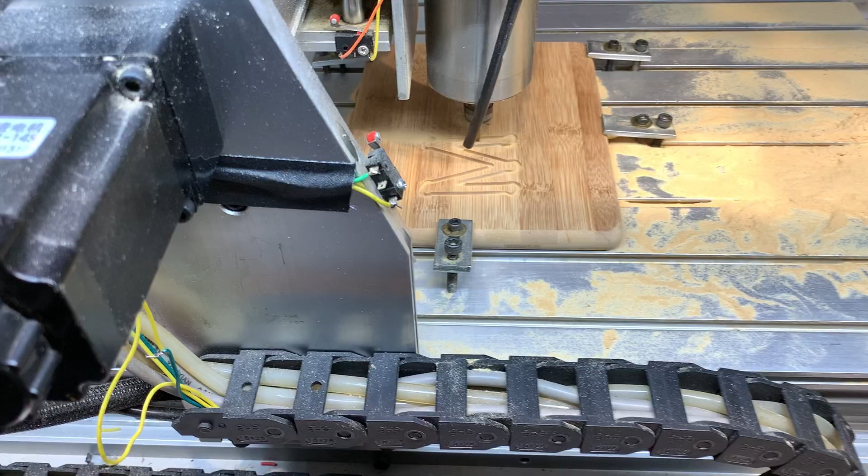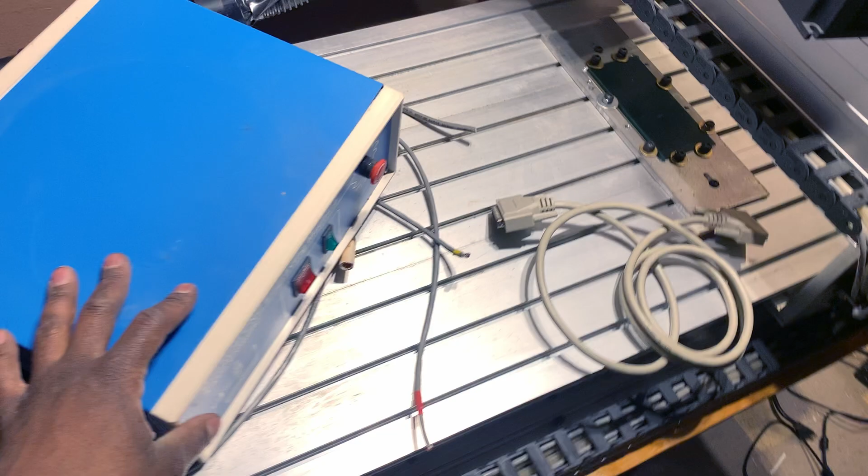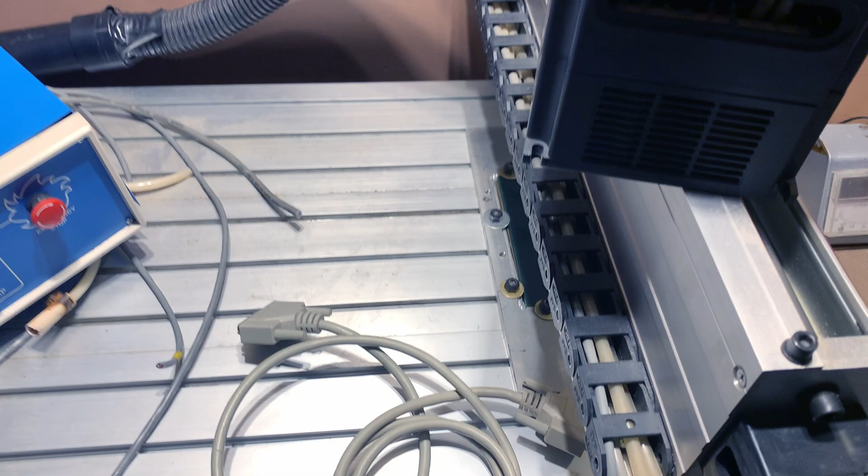Hello everyone, this is my latest addition to my shop, and in this video we're going to be rewiring all of this. I've already started, but I stopped because I thought I would document what I'm doing. You can find this CNC unit on AliExpress. It was donated to me, and I'm going to make it a lot better wire-wise first, and then we'll move on to some other things.

On the back, the wires were just sticking out of this slot. I'm actually going to put holes in here and run them out properly with connections so we can connect the wires in properly. There's a few on this back, not many.

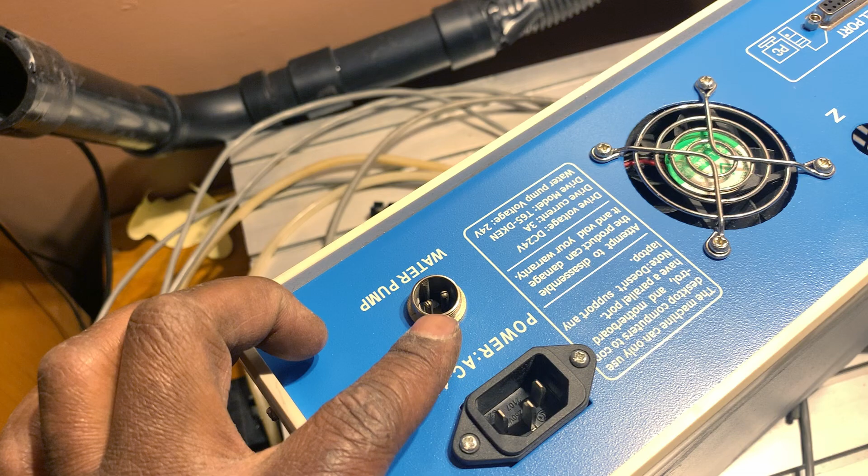This thing, the pump originally came through here. I'm guessing it was a 24 volt pump. I will use this 24 volt to switch a relay.

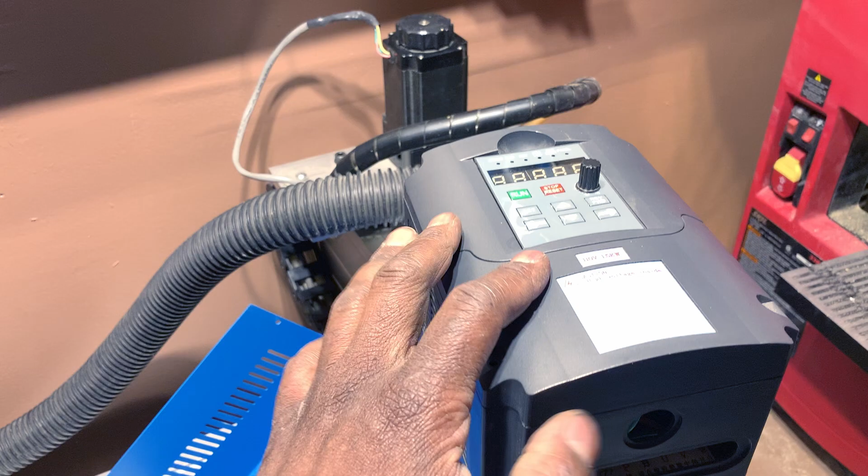And then I found out inside this box, in fact it's open here, the control board actually has a lot more capabilities and it's not being used. This little section here allows it to control this. This is a variable motor control, so you can speed up a motor, slow it down, and this can control that, meaning that the software here can control this, which can control that. So you don't have to manually sit here and turn this. I'm not sure why, when this was sold, they didn't do that. I'm sure that was sold with this unit. But that also means I'm going to have to put another hole back here to run it.

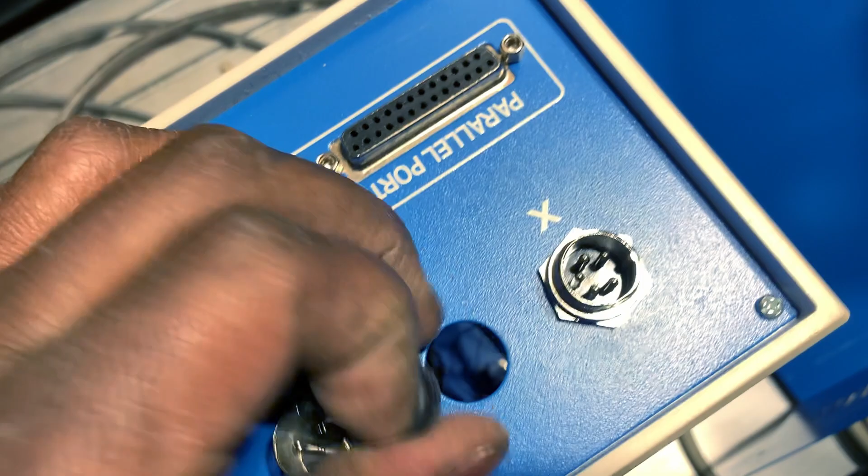But anyway, there's a 3. Let me put this over here. I'm going to grab a 3 for now and just show you what it will look like. That's what it will do. So this is perfect. And that one, again this one's 5, but that's not what we're going to use. We'll use a 4. This is just to show you what it would look like.

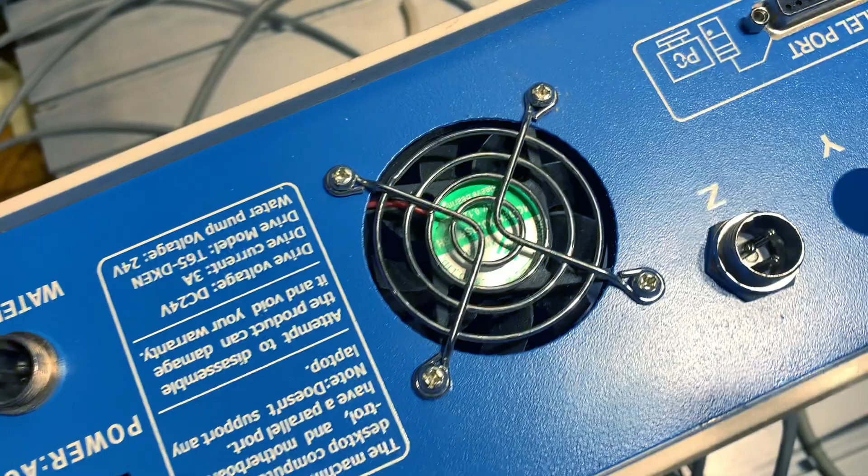Let's see if I got one more in here. Well, of course you can see what it's going to look like because there's one right there. I mean, it's the same exact thing, except that these are... and here is another 5. So I was able to find 4 of them. I'm getting kind of short on them. I'm going to have to buy a few more.

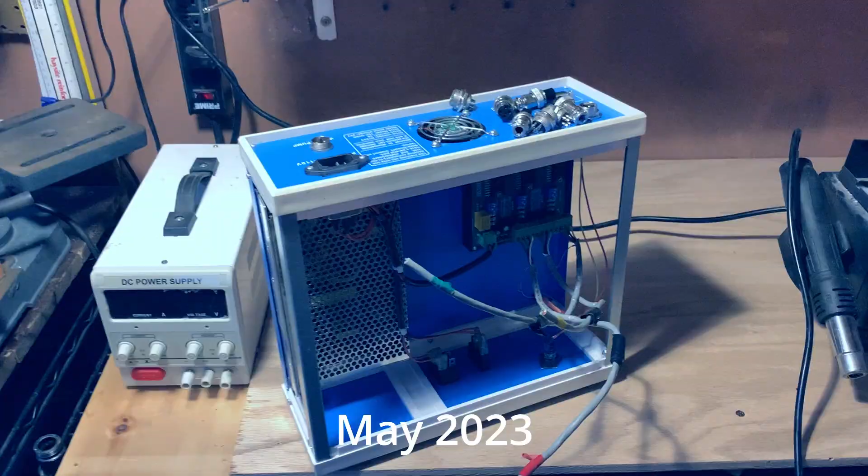So I've been redoing my electronic desk where I do all my electronics. Oh, that's interesting, my printer just came back on by itself. So it's very bare, but that's okay.

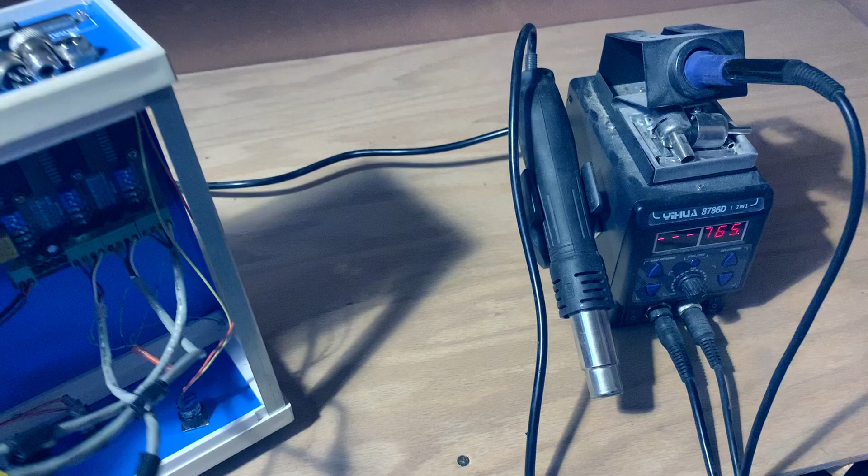I'm going to try to keep it nice and clean this time by not putting all kinds of useless stuff on there. I used to have my drill batteries there, used to be charged here. I think I don't like that, it's just too much clutter. I will move all this stuff into the closet space that we were just in.

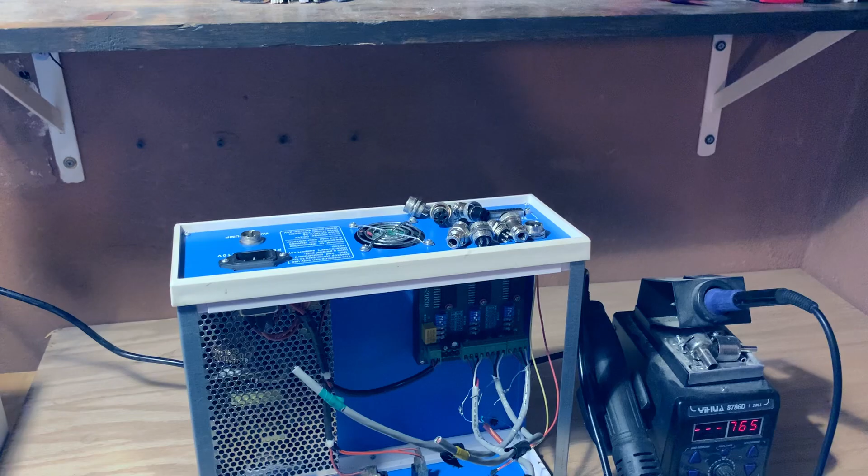But this is a great space to work on this stuff. I'm trying not to do it at my computer desk. It just seems I end up putting everything on the computer desk, and it just kind of gets in the way there.

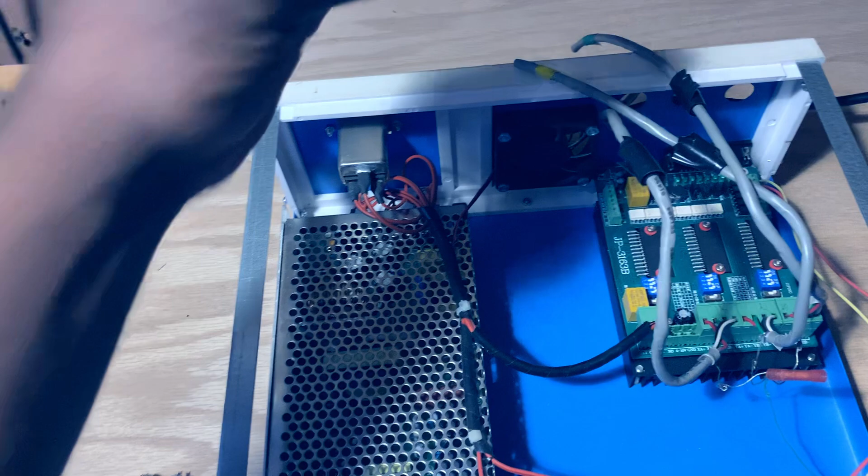This is pretty much one of the things that's always good to see how this goes in, and these come in from the back. And I was going through some of the boxes that this router CNC machine came in, and I found all this mess, minus this. This is the stuff that you just saw me get.

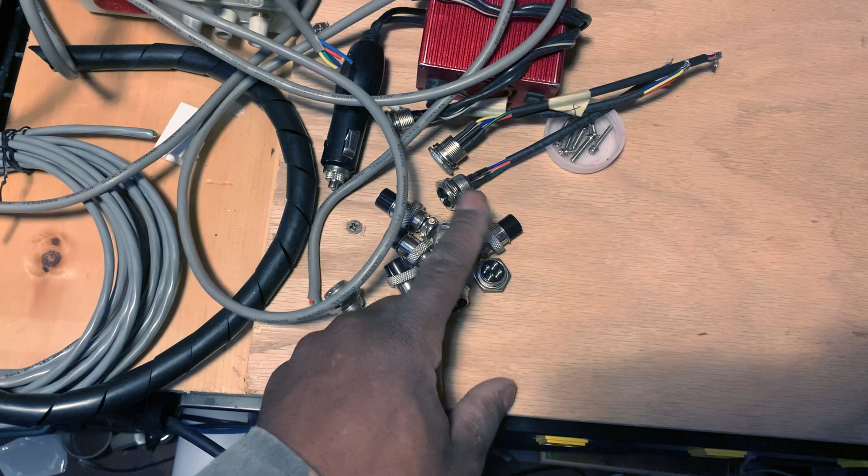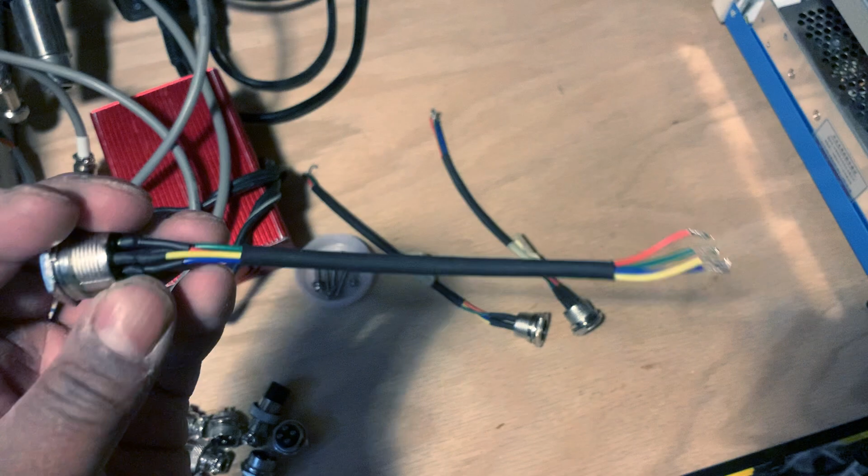But so this machine did have those connections on it. They're exactly like mine, they're already set, so this is perfect for the inside. I won't have to do anything for the inside, they're ready to go. The only problem is I'll have to do a color code swap, meaning the ones I had, if I remember right, were black, red, white, and green. So this one doesn't quite correspond with that. We've got, only thing we have in here is the green and the red. So I'll have to make sure that I get the yellow and blue, and then who knows what the wiring is. Let's see.

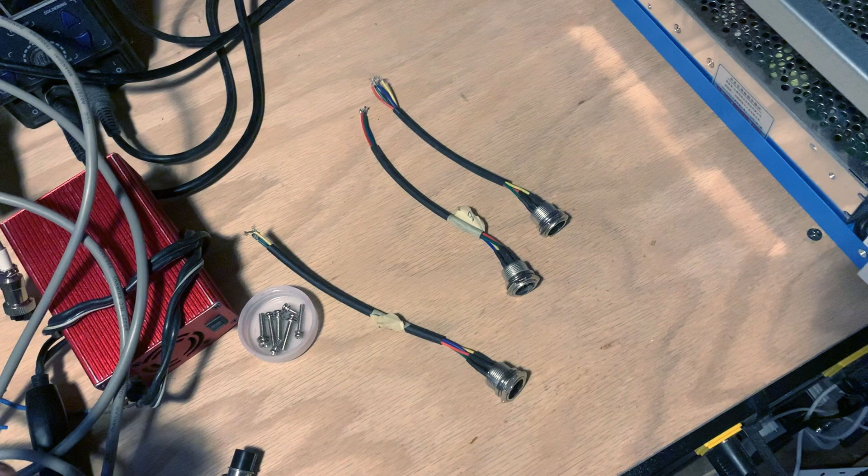So what I'll do is plug it in and then wire it in, and then I'll know what goes where. But that's not a big deal. It doesn't matter what I do on this end - they'll be the same, because as long as I wire the other end the same, this end will be the same, and I can then plug it in. This part goes into the board down there and then runs to the back. So that's not a problem.

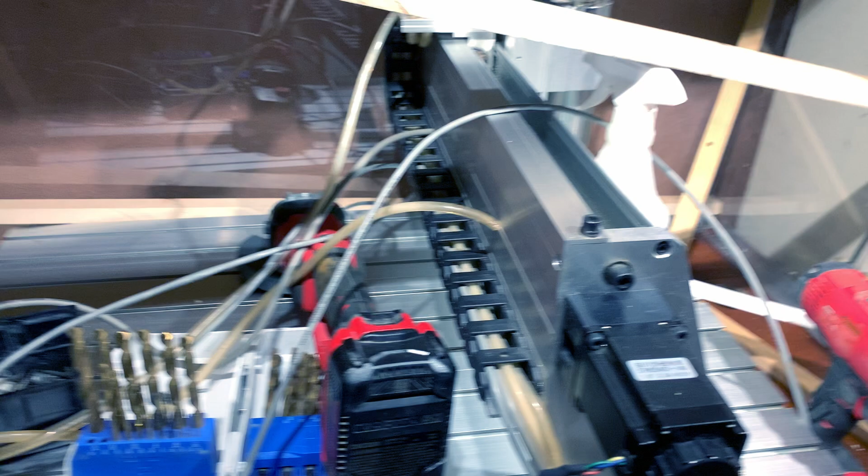Here's a quick update, I'm starting to put a box around the CNC router now, using the plexiglass that was given with the CNC router. And to dress this up, I have all this aluminum channel for the trim, which I'll use on this stuff. There, it's going to go on the edge here.

I'm kind of finishing up for this evening, so everything's a mess in here right now, but I have things set up so I know what I need to continue doing tomorrow.

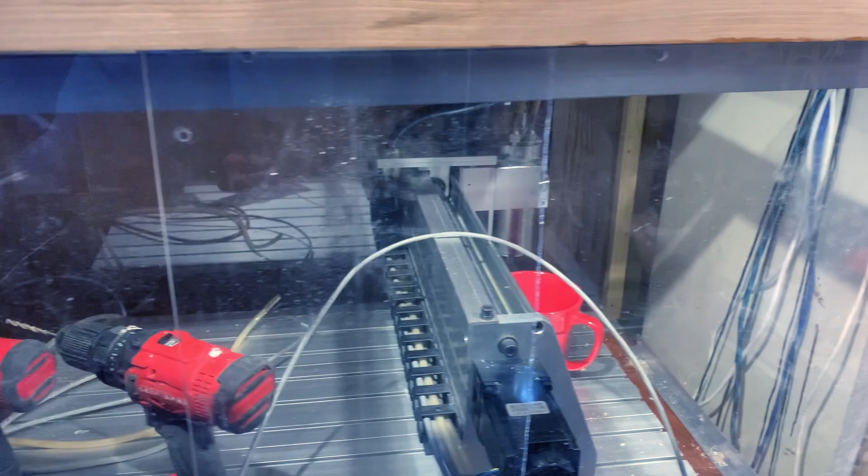This is the finished product when it comes to the box. I put these sliding doors here, hopefully you can see that. I was going to do hinges - remember I said I was going to go up, but I changed my mind. This works out even better.

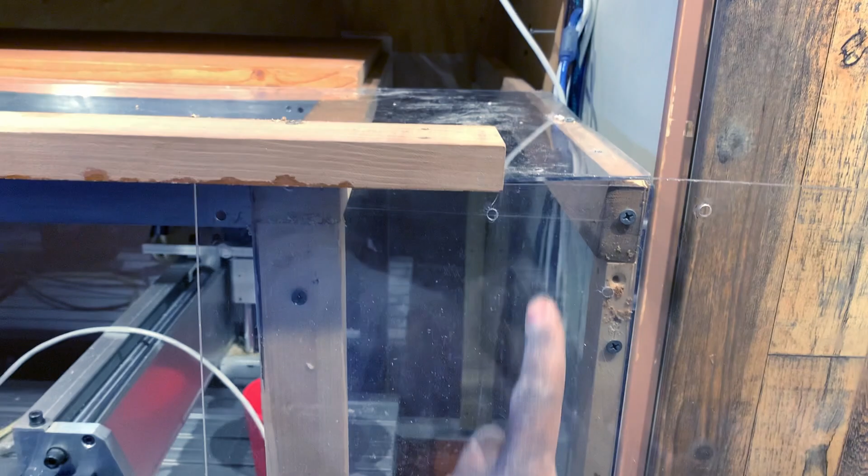I didn't have enough plexiglass to do the whole top, but I put this wood back here. This is removable, easy to remove. That gets light down in there so we can see it. I also didn't take my slide guides all the way to the edge, that way I can take the doors off easily if I want to, but they still slide all the way out of the way.

So it is now November of the same year that I started working on this video. As you saw at the very beginning, I have got the machine running, but there's obviously some things I didn't show you. One of them, you saw me bringing out these wires and putting these metal sockets in the back. But I never actually videoed me finishing it, and there's no record of me doing it. So I'm going to quickly catch you up, because at the beginning it was April and now it's November, middle of November. In fact, next week is Thanksgiving of 2023.

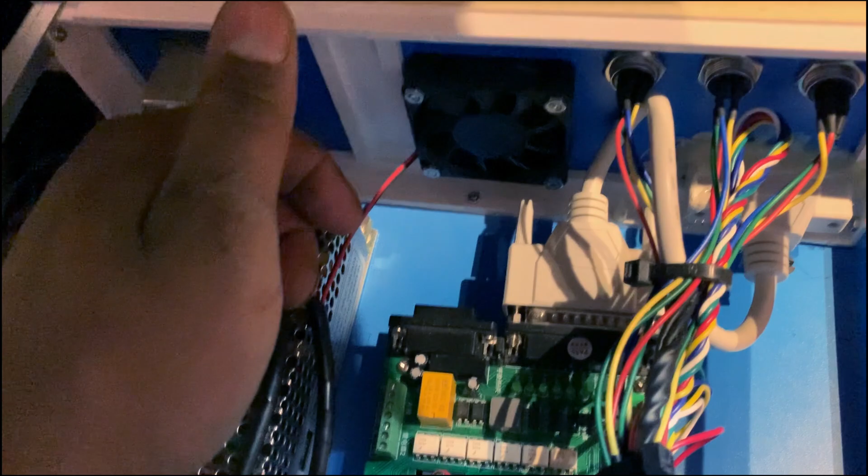I found out that this control board was bad, so I bought a new one, and it's a newer one - usually there's an A instead of a B here. I transferred all the settings on these jumpers. It is not USB, it is parallel port. A lot of young people, if you watch this, know about USB and USB-C - well, this is parallel port, it was way before that.

This is not - it's new, but it's using older technology, which is perfectly fine, I actually like it. But it also means you have to use Windows 7. And this is Windows XP, not even Windows 7 - I think you can use Windows 7, but I'm using Windows XP. This is an old computer that I found. I was able to buy new motherboards and everything for it. It has a parallel port on the back, you can see it there.

I do have this networked, not for internet. Cat not included.

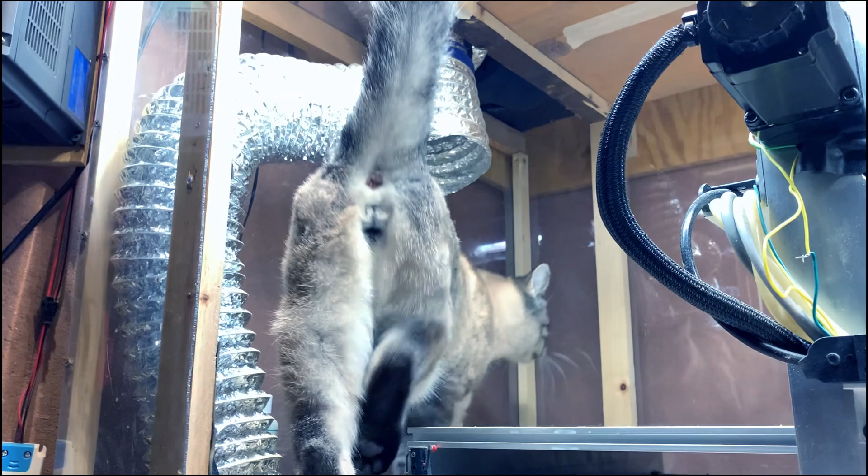Come on, I want to put you over here for a second. Okay, you can go up there too, that's fine. That's actually where she used to hang out when I had my laser etcher in here, so she'll kind of hang out in here - she really liked it in there. Now the laser etcher... I can't even speak this morning... the laser etcher is now here, and she can go around the back. So, what's wrong? What's going on?

Her name's Monica, because I know someone's going to ask. Anyway, I've done all the wiring here - we're ready to go, obviously, because I've already made something with it. I've also put limit switches in, and I took the emergency stop, which is usually here, off, and placed it up there now.

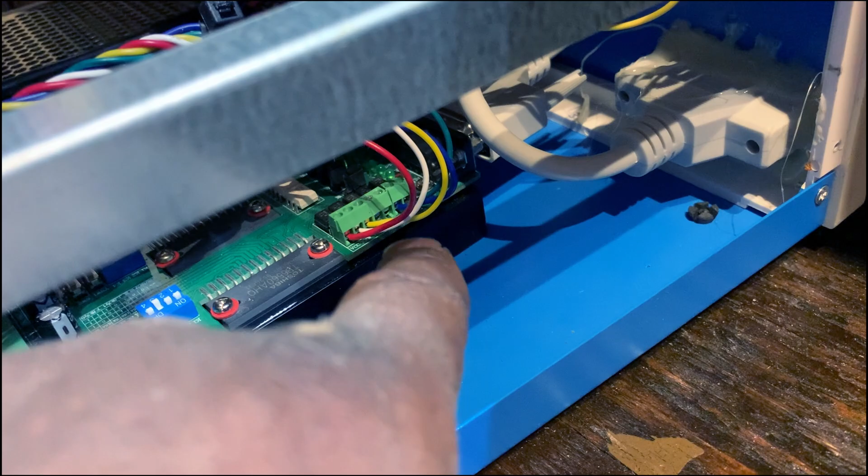This is now where all the limit switches come in, and they're wired in properly. They go on the side of the board here. The emergency stop comes in here too, and all that runs up through a hole that's down there.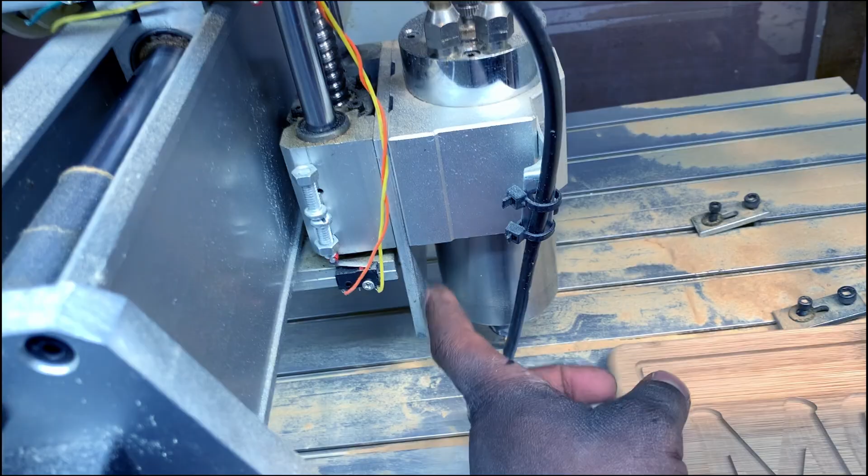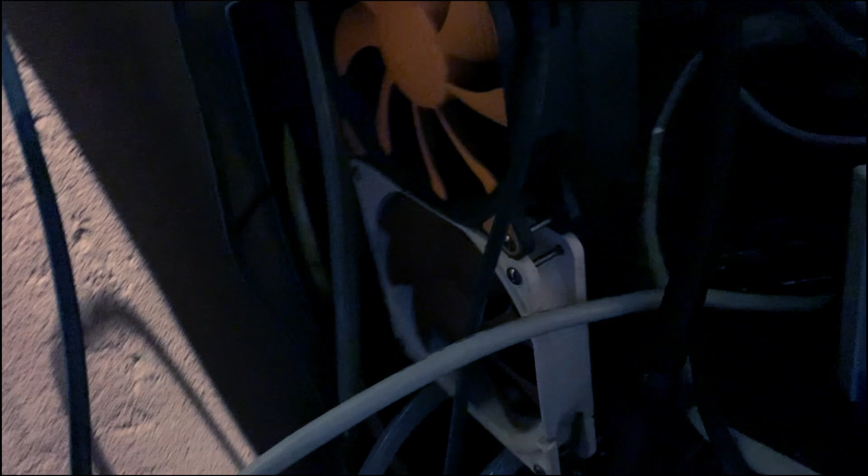Another thing I did is that this is water cooled - the spindle is water cooled. I'm not done cleaning up wires yet, but it is water cooled, and all that flows through a hole down here and goes to a radiator. So this is properly water cooled. It's not just dumping into a bucket, which is what most of these machines do. There's a reservoir down here and the pump is down there. I'll get all this mounted up later.

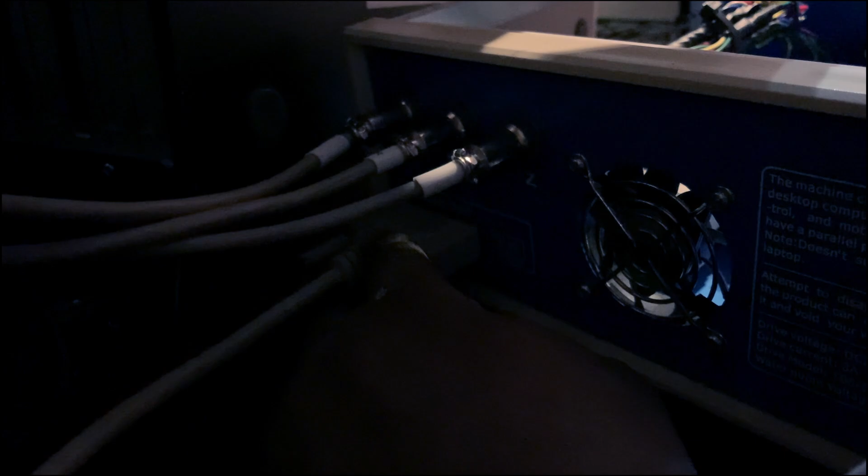What else did I do to this thing? Oh yeah, since this card doesn't go with this box, I had to get this extension parallel port, and everything else is the same in the back. I know you probably can't see all of it, I'll try to brighten it up. But X, Y, and Z are here, parallel ports here.

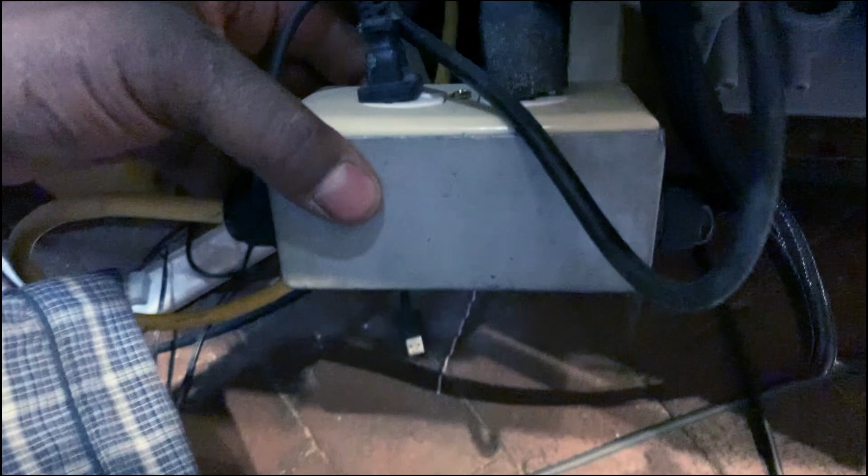Here, I've changed this. This is where the 24 volt pump used to go. There's still 24 volts coming out of this, and it works from this switch up in the front. But what I've done is it now pipes into this little box, and inside this box is a relay, a 24 volt relay. So when I hit that switch, it switches these plugs on.

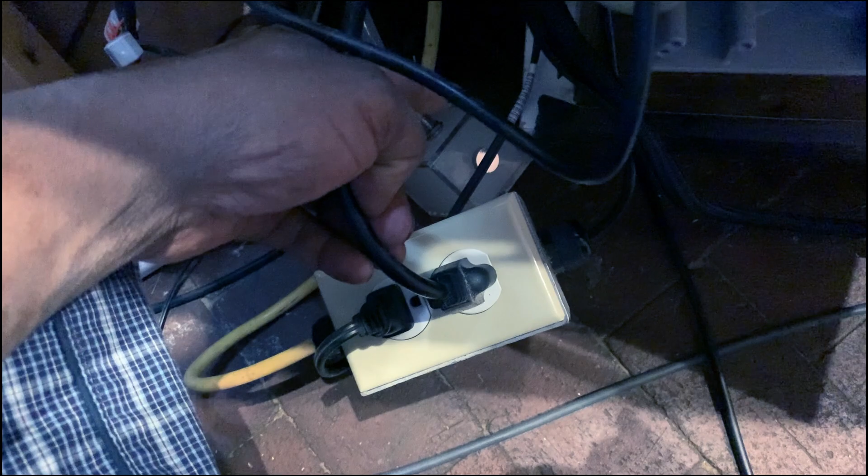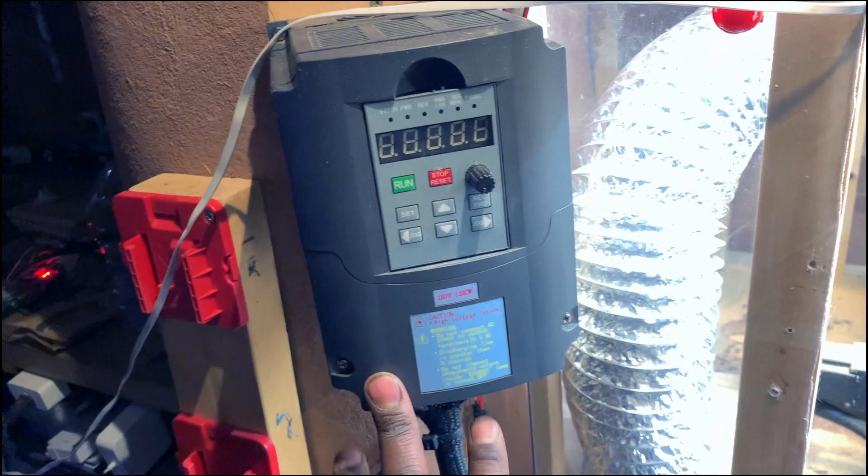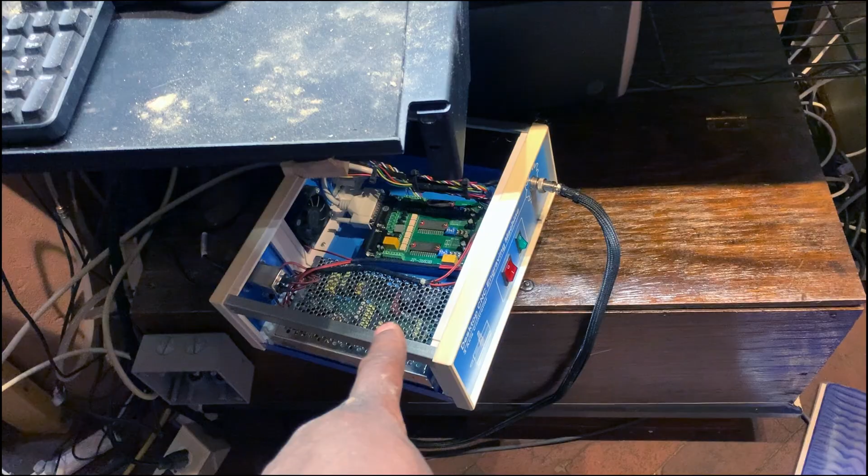One goes to a pump down there, which is a 12 volt pump. The other one goes to - I can't remember what that one. I think it goes to this, I'm pretty sure it does go to this. It powers this, and this is what powers the spindle. The last big update to this machine will be running multiple wires from the spindle down to that box, so that the software can run the spindle.

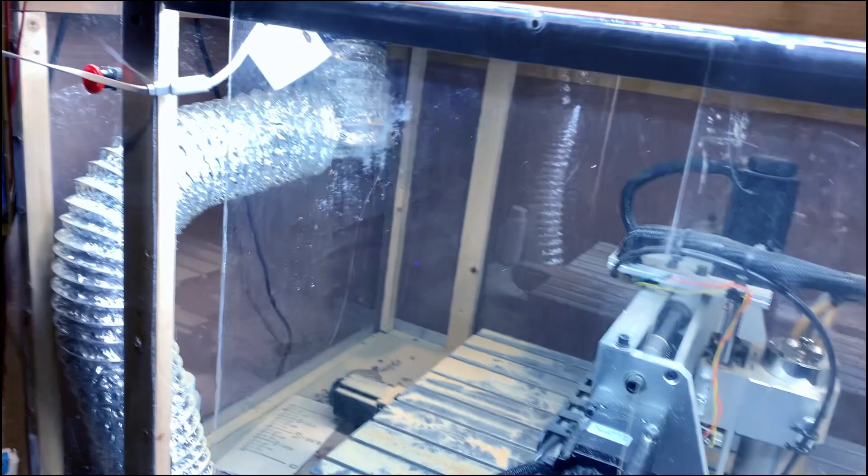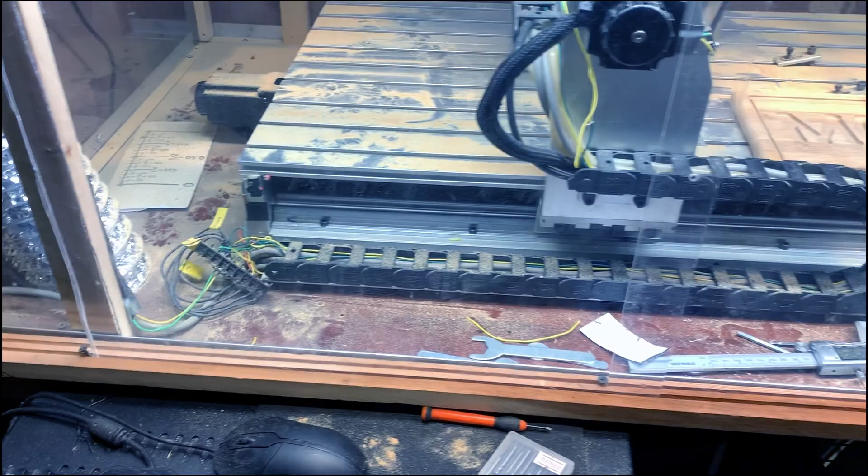So there it is, this is everything all finished. I've also put ventilation in, which isn't controlled anywhere here yet - I've got to fix that. And I've put lights in, again, not controlled anywhere over here. So what I'm going to end up doing is putting a little box here and putting light control and a few other little switches here. And then we're ready to roll, meaning that I've cleaned up all the wires, basically.

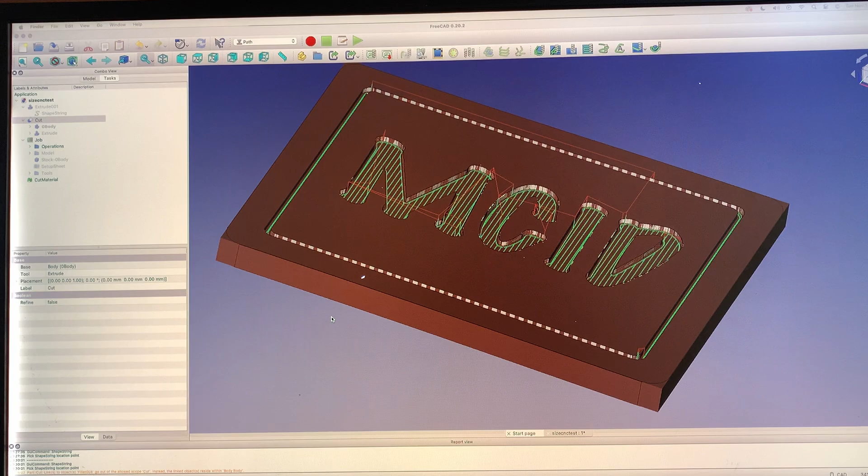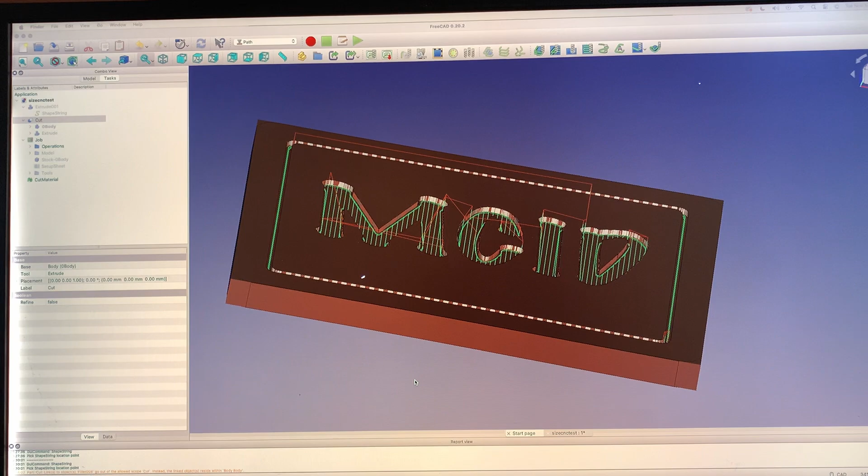But I have had this CNC machine, and obviously this isn't the CNC machine here. I figured I would show you what I've been working on for the CNC machine. So this is a 3D design, and to use the CNC machine I had to learn how to do CAD, something I've never done before. I've done two-dimensional drawings for years and things like that, and I won't go into major detail on how this works, but I had to learn how to design this so we can actually see it in 3D as opposed to 2D. I could do all this in 2D, but never done 3D before. I'm still getting used to it, as you can see with me flipping this all over the page here. 3D is a totally different thing, but I seem to have done it.

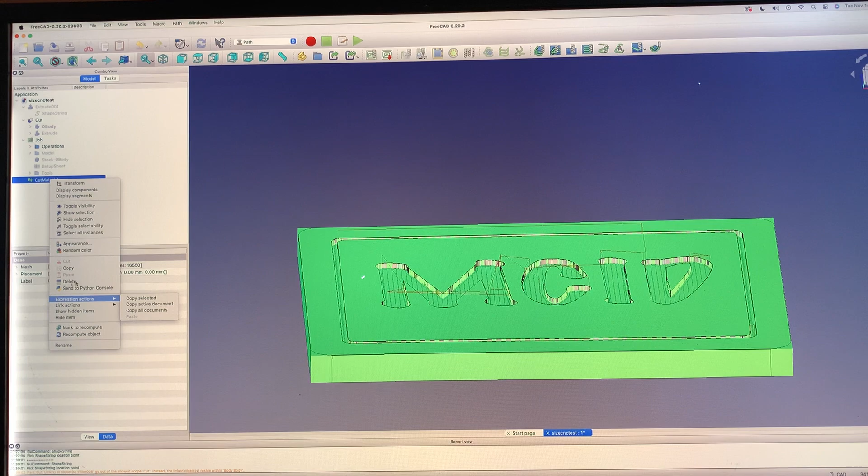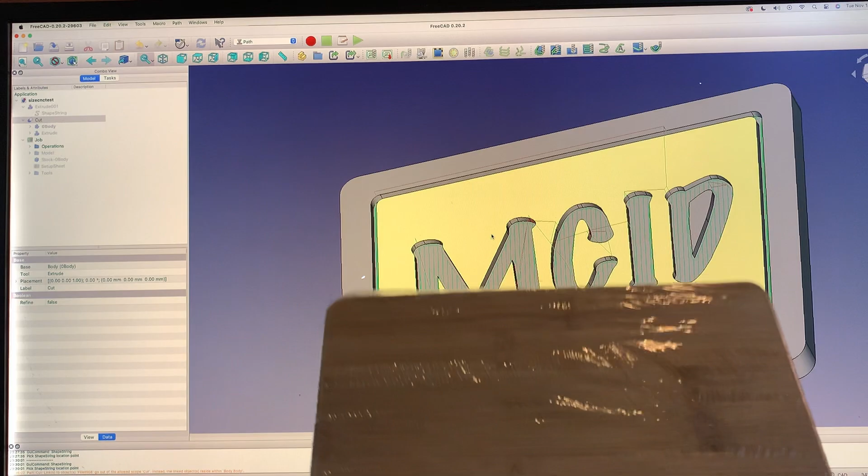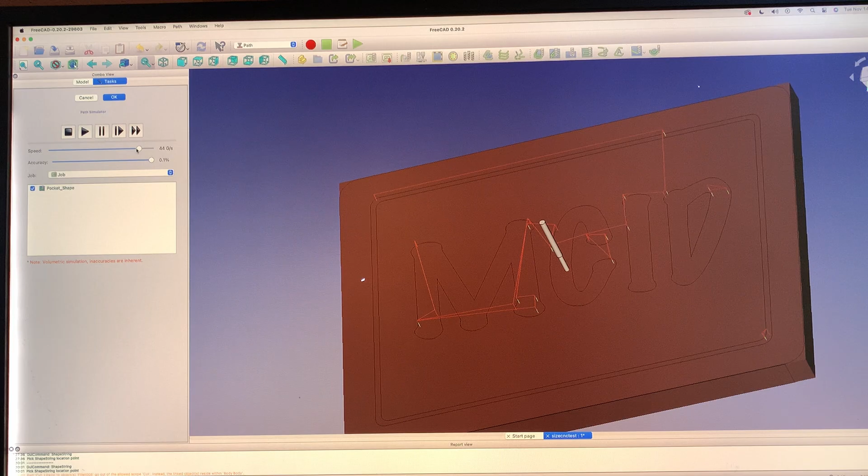And now I'm going to show you, before I actually show you what's happening in the background with all the noise, let me show you what we're doing. So this is on a cutting board made out of bamboo. So that's exactly what you're looking at there. I drew out the whole cutting board onto here. Now I didn't bevel the edges of that cutting board just because I didn't need to - I just needed the proportions of it. Then what I've done is I added this text, and then these green lines that you see running up and down are the actual bit of the mill. Using FreeCAD, you can actually see this. I'm gonna go in here and run it, slow it down just a little bit. So this is the actual end mill here, and it's now going to run what's happening in the background now, virtually.

While that is running, I'll explain what it's doing. It does two passes, that's the reason you see it running back over each letter more than once. It's running at a speed of 250 millimeters per minute, I think is what it is. For people who do milling using a CNC machine, you probably know what I mean.

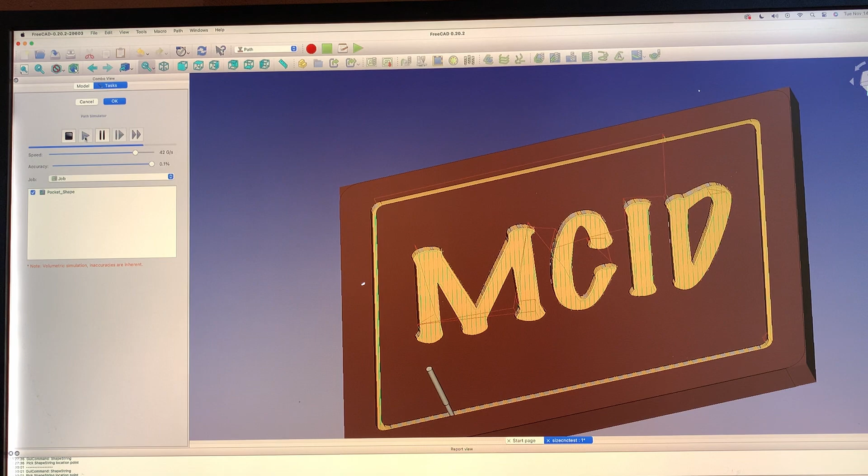So let me show you what's happening on the mill now. Ultimately I will get some air that will flow through and clean it up for me, but just so you can see it again.

There's been several things that have kept me from getting to this point. One of them is that when I would cut something, it wouldn't cut to the proper proportions. You can't see this one, but this is one of my test pieces, and originally it said 'default,' but it left off the D. It was cutting it too big, and that was because of the step motors.

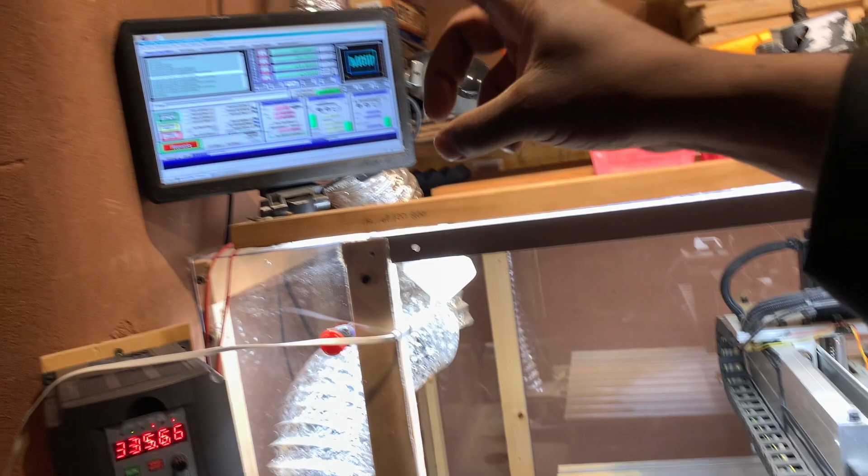The step motors are the motors that actually move the bits and the heads. It's this thing here. To fix that, you have to go up to the software, which is running up there—it just cut off, hold on. In the menus, it's got all the stuff to set it up, and I was able to get that fixed. So anyway.

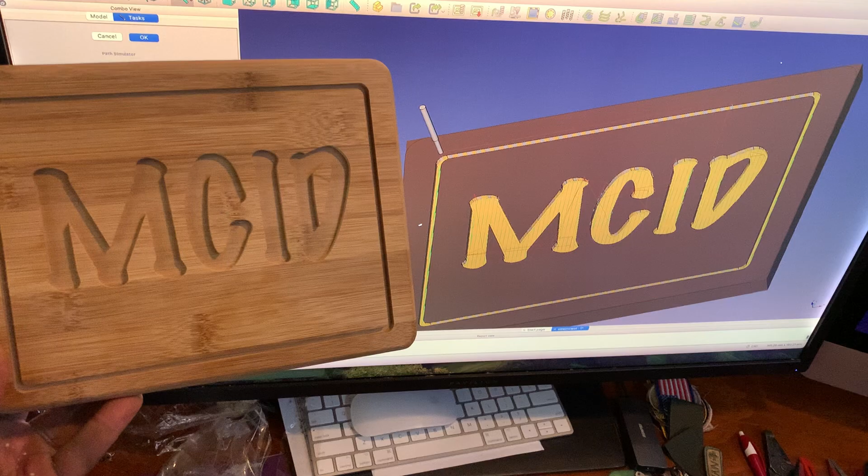If this finishes within the next few minutes, I will let you see it right here. All right, so here it is—not bad at all. That took about 35 minutes, I think. Let's see, should still be here. Yeah, there it is, 35 minutes right there in the center of the screen.

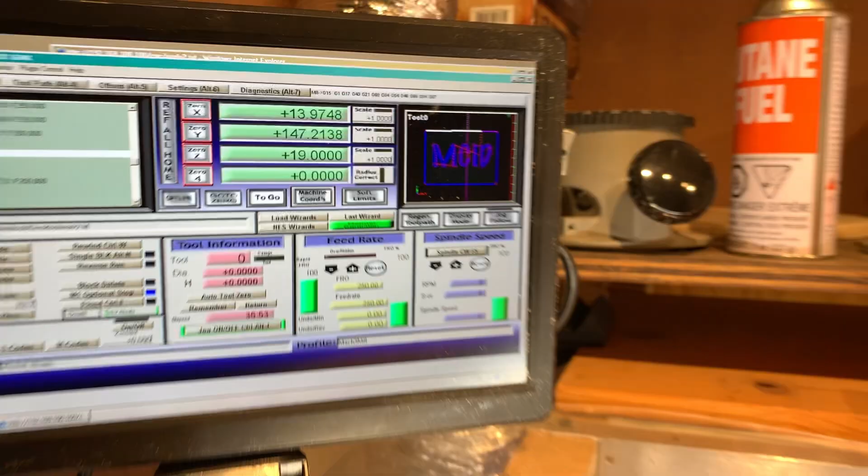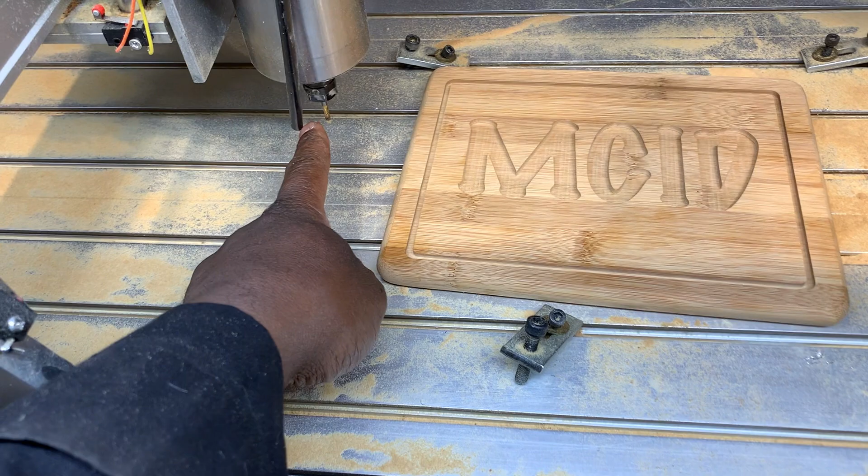For those who do this type of stuff—I'm new to it, obviously—there are several different ways to line up the head, that part there, the end mill, to get this centered properly. What I do is a center alignment: I put a little X where the center is and move this head over, which I can do, or jog as I call it. I can do that with this.

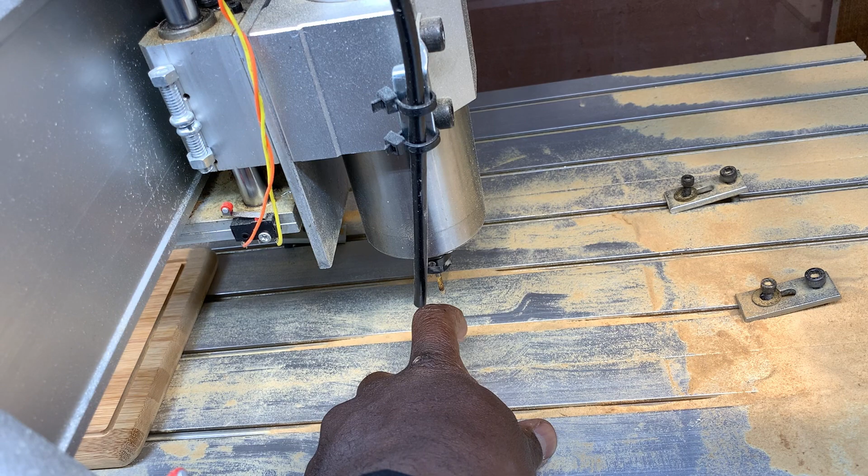You also have to clamp it down, and once it's clamped down and squared up properly, you can move this to your center point, which is somewhere under that C. You also have to set the head. Now, I don't have a probe—there's usually a probe that comes down and touches, and that's what they call homing. The way I do it is I line it up with one of these cracks here, and I take a thin piece of paper and run it across to make sure that head is as close as I can get it to the top, and then I can set the zero.

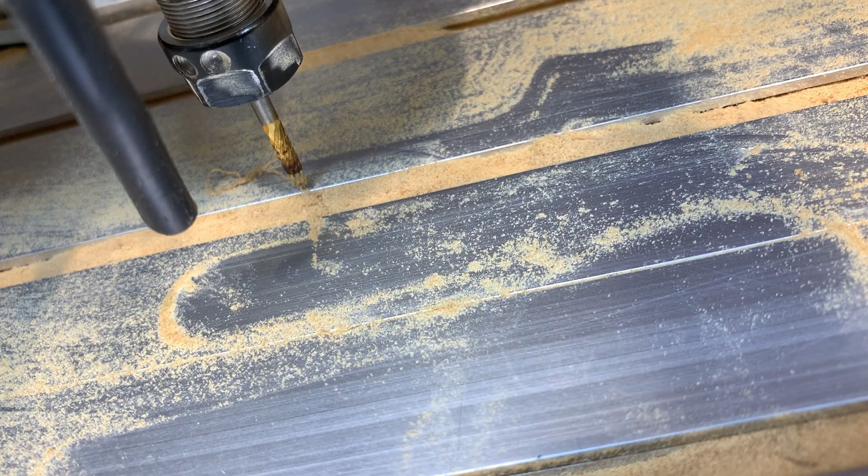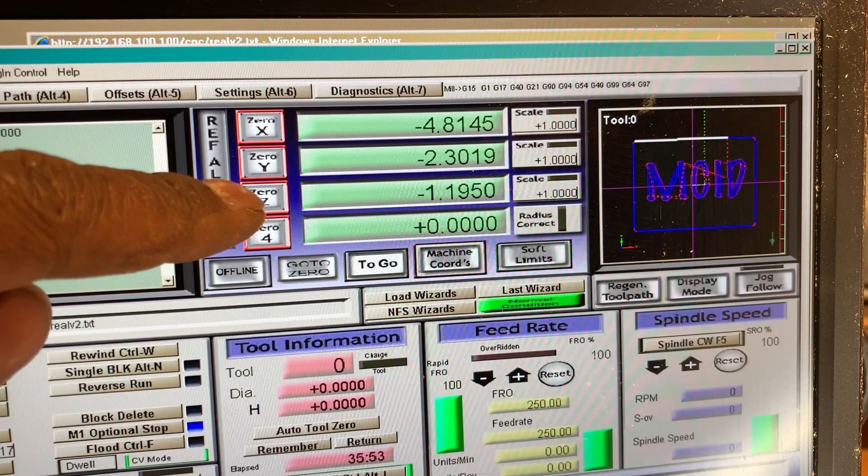Usually the zero point stays. Let's see here. Okay, so that should read almost zero, and we're just below—I'm reading this Z axis here, which is 1.1. I'm going to bring it up just a little bit. We'll hold it there, that's close to zero. So I should be able to take this piece of paper and almost run it under... there we go. There's not that much tension on that paper, so that's very, very close to zero.

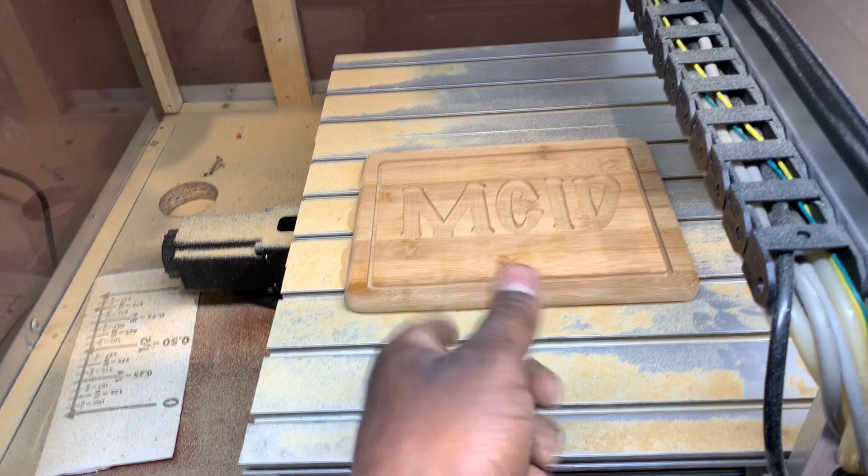That's how I figured that part out, and then everything else is basically just lining it up with your piece of wood that's on there. There are other things that have to go into all this that help you get it done. So anyway, it's working—look forward to some really cool stuff coming off of this machine.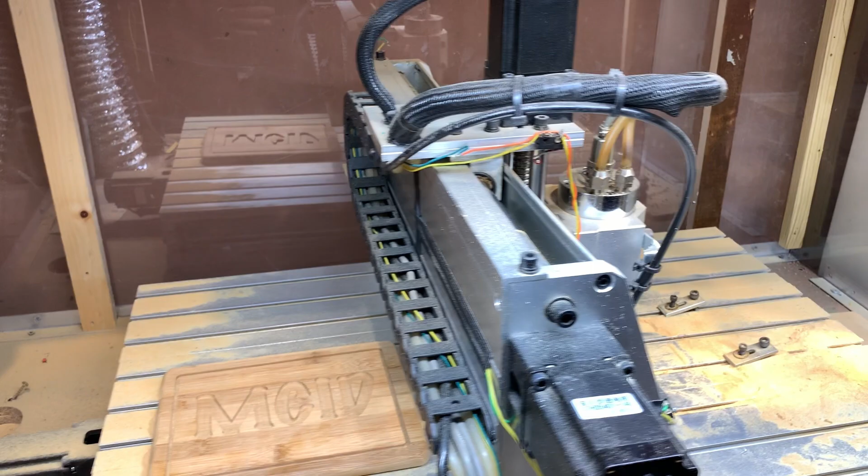I've got some things lined up now. I've got a bunch of wood up here ready to go. I usually use this stuff with my laser etcher. This is stuff a lot of you didn't know I did anyway. Let me move my door.

That was done on my laser etcher. It's a very cheap one, like maybe a $150 laser etcher that I've gone and put into this box down here. And there it is, a very big one. Works great. It is controlled by this computer also, but I don't run them both at the same time.